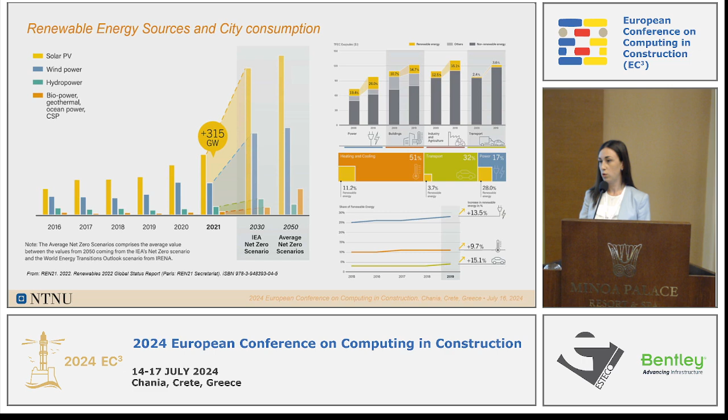At high latitude, the PV panel installation has increased a lot, especially during the last few years, and especially after the pandemic period. And assessing the solar potential also of the facades is very relevant for high latitude countries due to the low solar altitude angles reached for most of the year, and for the presence of snow on the roofs for several months during the winter period.

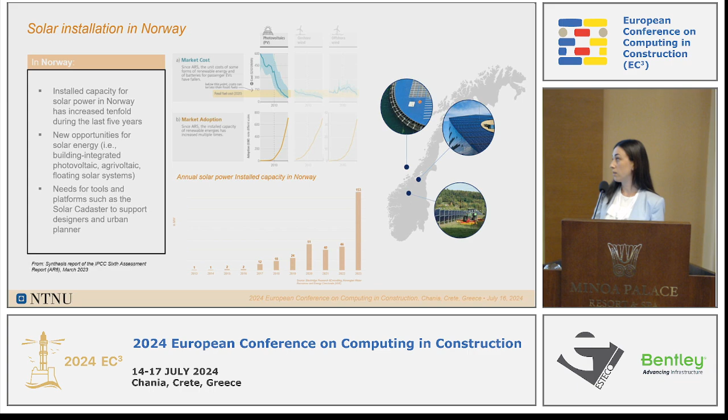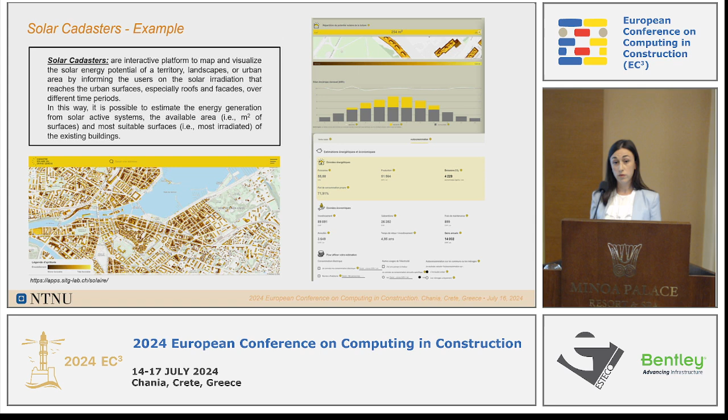In this way, advanced and innovative technologies for renewable energy sources evaluation are represented by interactive urban energy planning platforms that can help the implementation of design strategies within the existing urban environment. Specifically for urban solar energy planning, we have some tools called Solar Cadaster, and this tool can facilitate users to make some preliminary decisions about PV panel installation in the existing built environment, and they can also calculate, for example, some costs or benefits of interventions, and also visualize the most suitable parts of the rooftops or also of the facades for PV panel installation.

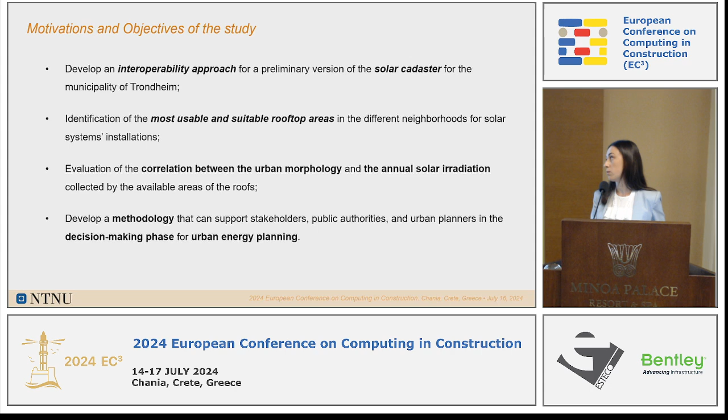In this regard, the novel contribution of this work is the development of an interoperability approach for a preliminary version of a solar cadastre for the municipality of Trondheim, which was chosen as a high latitude case study. This solar cadastre is in a preliminary stage for the moment, just for the roofs. In this work, I will also present the identification of the most usable and suitable rooftop areas in 3 different neighborhoods for solar system installation. And one of the objectives of this study is the creation of a methodology that can support not just the private users, but also, in the decision-making phase, the public authorities to develop energy planning interventions.

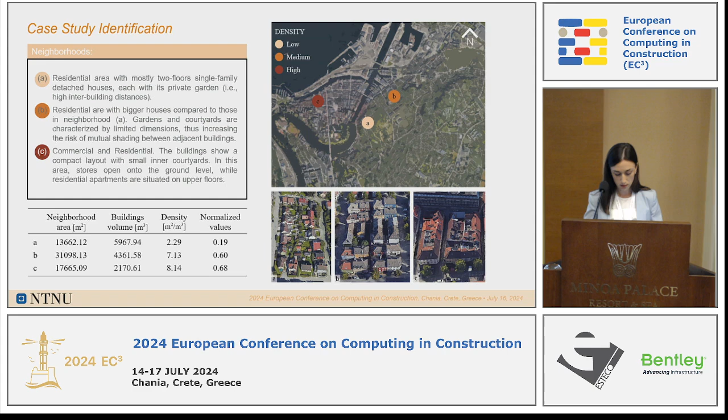First of all, we selected 3 different neighborhoods in Trondheim, corresponding to 3 different levels of density: low, medium, and high density neighborhoods, with different functional and morphological characteristics. For this study, the meteorological input data were collected using the Meteonorm software, while the geometrical input data correspond to 3 different types of files. The first one was the DSM file, the digital surface model, for the shadow casting calculation and also for calculating the slope and the aspect. The second one is the building shapefile, containing the 2D representation of the building footprints enriched with information about the building's function. And the last one was the CityGML file corresponding to the 3D building model of the 3 neighborhoods, constructed with automated reconstruction techniques.

All these inputs were used for the creation of the solar model. This solar model is based on an algorithm encoded in Java, and this was useful for the calculation of the yearly solar irradiation of the neighborhoods. These outputs from the solar model were then post-processed with a Python script for the identification of the most suitable areas for PV panel installation on the roofs. These areas corresponded to the optimal part of the roofs regarding solar irradiation, but also to the areas without any object that can obstruct the PV panel installation.

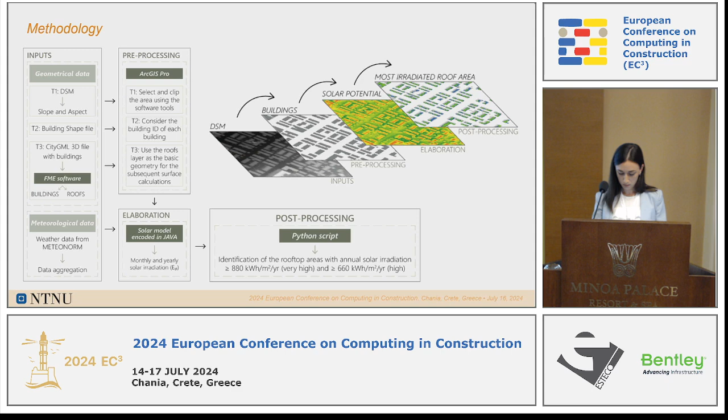Okay. Here we can see the results of the estimated yearly solar irradiation for the 3 neighborhoods. The first one, A, is the low-density neighborhood. Here most of the surfaces are very highly irradiated, due to the morphology of the buildings, because the houses are small and far from each other, and the streets are very wide, which allows very high solar accessibility. In neighborhood B, the medium density one, the roof areas with high solar irradiation are fewer and limited to the south-exposed roof slopes, while in neighborhood C, the high density one, the roof areas with very high solar irradiation are fewer, due to the shadow effect of the surrounding buildings.

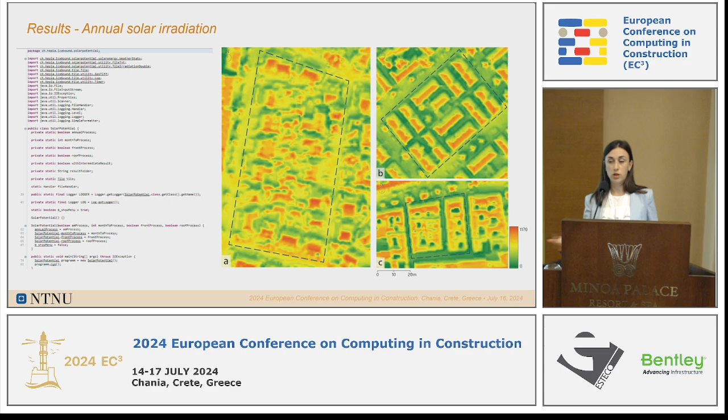After that, the annual solar irradiation maps were post-processed to identify the most suitable areas available for PV panel installation. First of all, we defined the range of values to consider the solar irradiation high and very high for high latitude countries, and we started from the literature to get this information. For considering a portion with high solar irradiation, we selected the raster pixels with a solar irradiation higher than 660, and we proceeded in the same way to classify the very high solar irradiation portion of the roofs, considering a threshold value of 880.

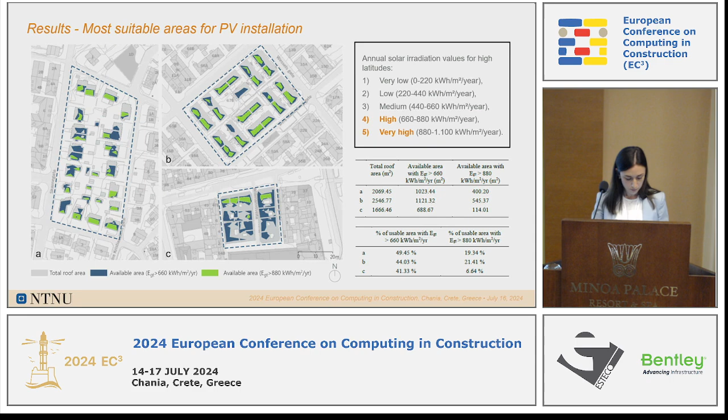Additionally, the raster pixels representing the elements that can obstruct the installation of the PV panels were filtered out. These elements can be, for example, the windows in the roofs, the chimneys, or ventilation or mechanical bodies. We also filtered out an inner buffer of 0.5 meters, as the solar panels cannot be installed in the proximity of the building's boundary. And we excluded from the analysis the areas smaller than 5 square meters, as they were considered too small for the installation of a solar panel.

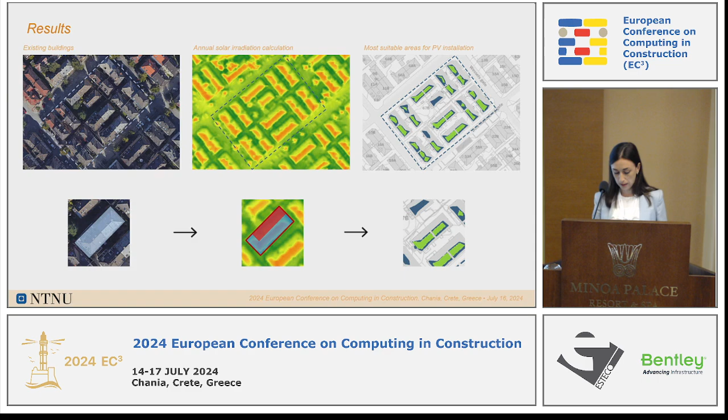The limited number of neighborhood case studies doesn't permit a robust correlation analysis between the neighborhood density and the available areas on the roofs for solar panel installation. However, it is worth highlighting that the lowest values of the available surfaces are always associated with the high density neighborhood, and this is due principally to two reasons. The first one, as I said before, is the proximity of the buildings that facilitates shadowing from the surrounding buildings.

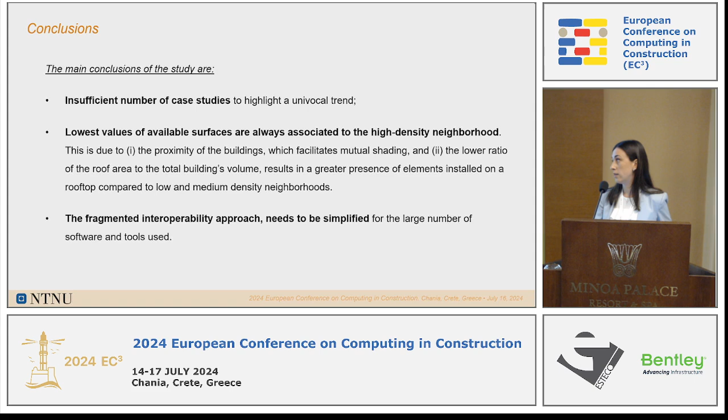The second one is the lower ratio of the roof area to the total building volume, because having many apartments and many floors in the same building results in a greater presence of elements installed on the roof compared to a low or medium density neighborhood with, for example, just one floor, meaning one house, one flat. Another point is that the fragmented interoperability approach that we developed needs to be simplified, given the large number of software and tools that were used.

Here are summarized the main limitations of this study. As I said before, just 3 neighborhood case studies can limit the capability of identifying strong correlations between the model outputs and the neighborhood density. Also the weather data, because it was collected by a meteorological station located at the airport, 35 kilometers outside of Trondheim municipality. In this case, we decided to use Meteonorm just to create a general and replicable workflow instead of using a local weather station, but relying on local data would allow more accurate results.

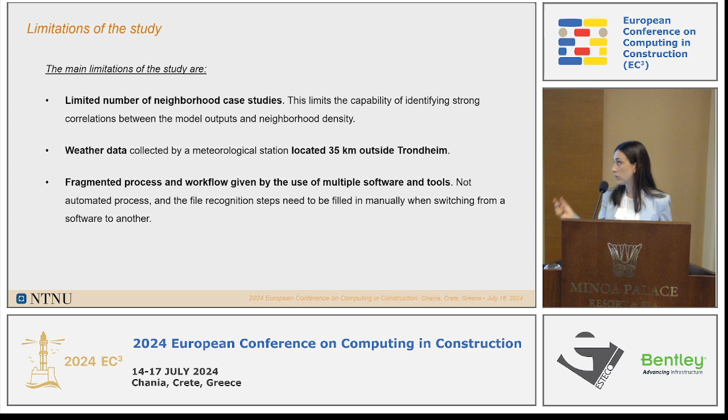And finally, as I mentioned before, developing the process by implementing multiple software and tools can lead to more accurate results, but using different working environments and different programming languages can also make the process more fragmented and not automated. For example, in the file recognition steps, when we switched from one software to another, we needed to fill in manually all the information about the position of the files.

Future development in this field may concern, for example, the enhancement of the workflow through the reduction of the fragmentation to reduce the computational time, especially when extending the calculation to the whole city territory. Also, increasing the number of neighborhood case studies can help to find more robust correlations between the morphology and the solar irradiation. Exploiting local data and validating the results against real measurements to find if we have relevant results. Extending the analysis to the facades by including the optical properties of materials and the detection of external and architectural elements in the calculation.

And finally, the last point, which is one of the most important for our project, because at the moment there is no solar web platform providing the extent of the usable area in Norway. Among the future developments, there is the ambition to transform the 3D geometrical model joined with the solar irradiation calculation into an interactive 3D cityscape platform that can be useful not just for private users, but also for municipalities and urban planners to develop urban planning guidelines and to provide recommendations to optimize the use of solar energy, especially for high latitude countries.